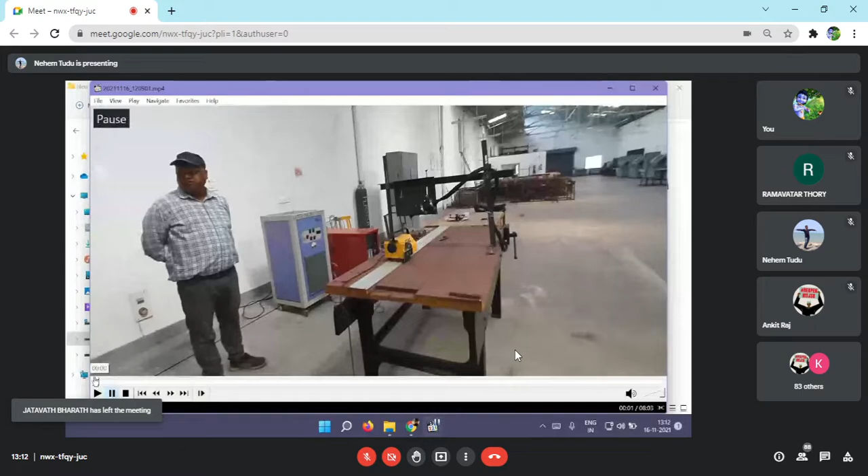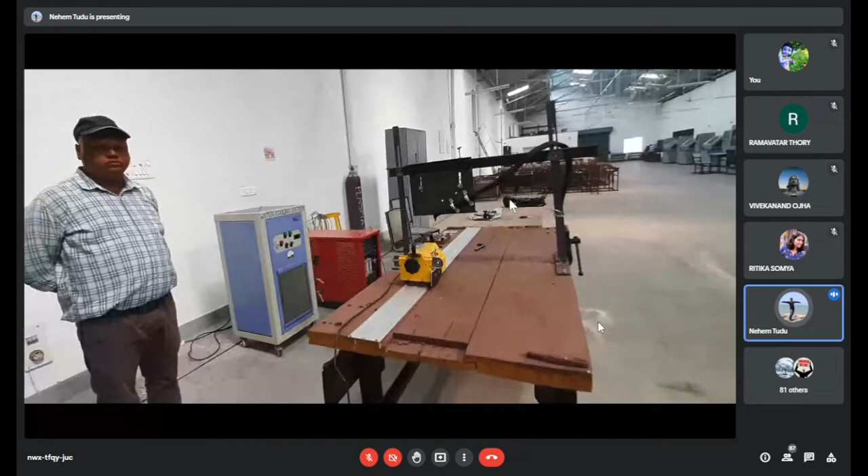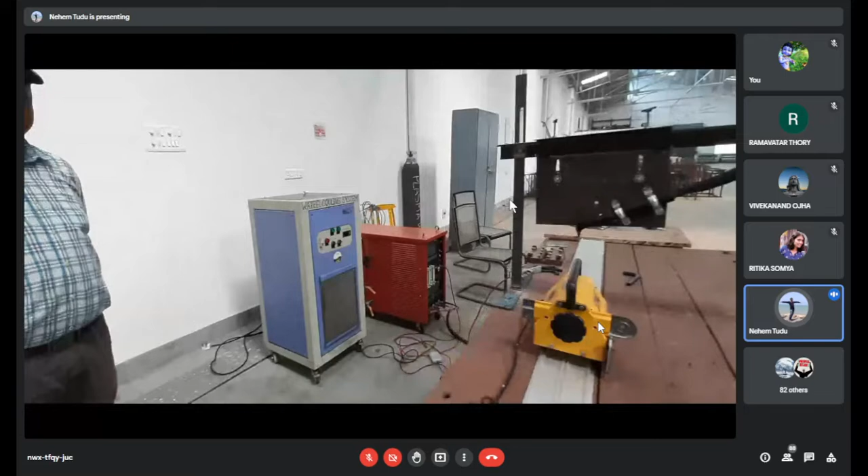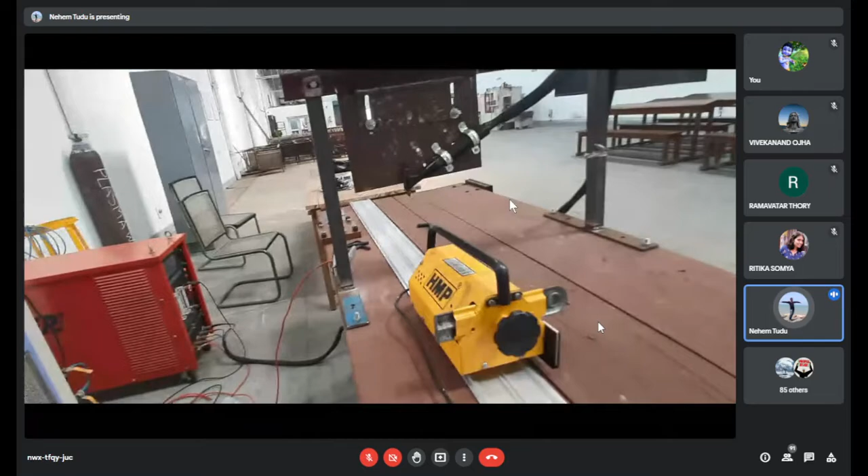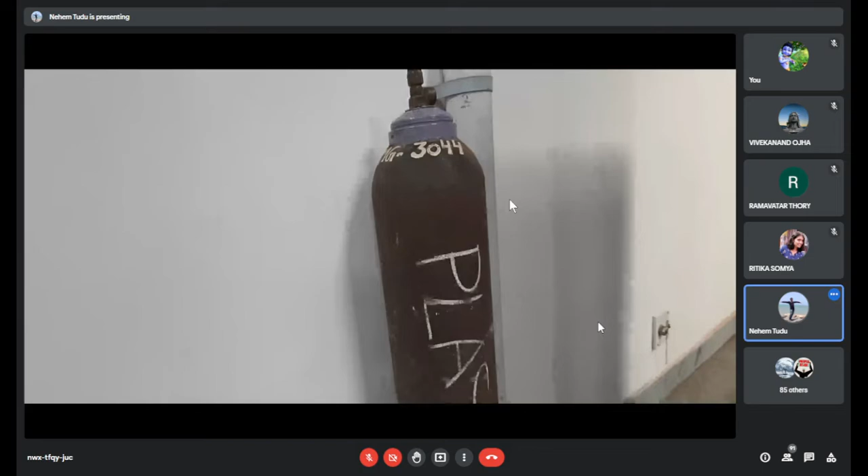So this is a cylinder, an argon gas cylinder. Currently this is empty, so it is going to be refilled soon. After that we can start working on this plasma welding setup. And this is a cage where this cylinder will be kept.

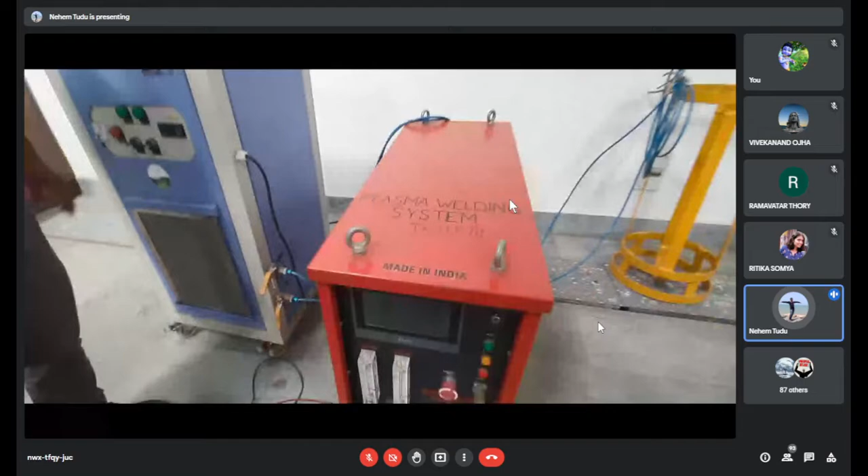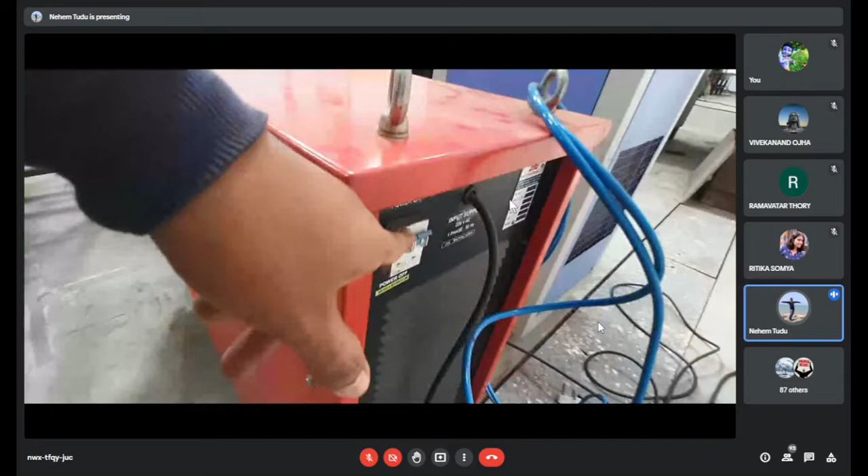And this is the plasma welding system. From the back side we can see there is a power switch, and when power is given to this, there is a main switch. Here we can switch it on and off, and here there is water in and water out. This water will come from the water cooling system.

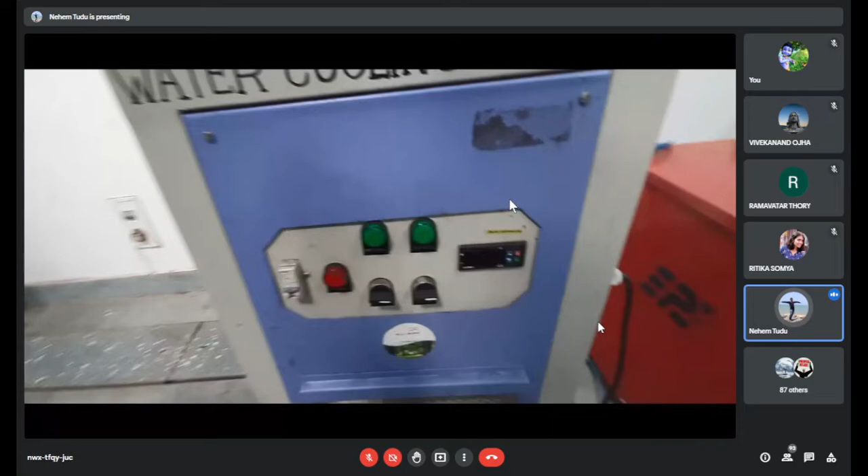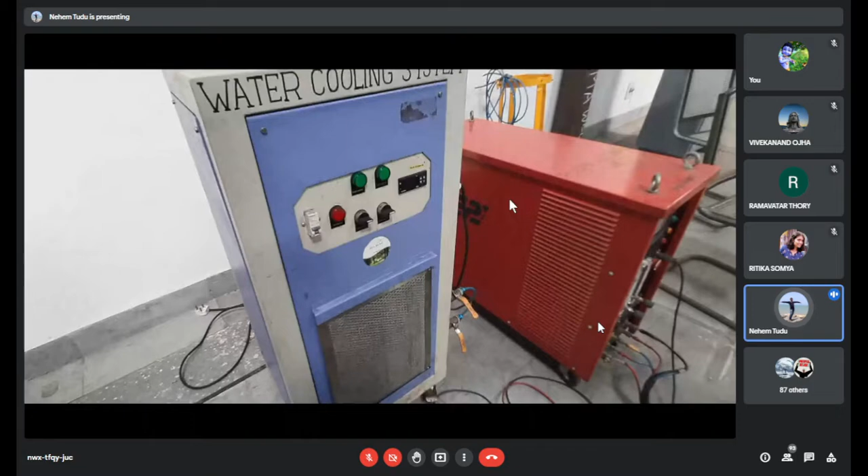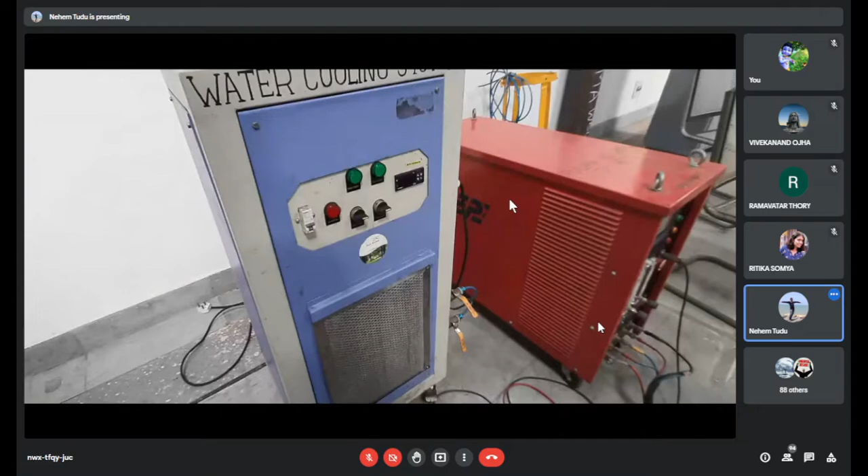This is a water cooling system, basically a water cooler. Its function is to cool the water, and the purpose of cooling the water is to control the temperature of the electrode, because while doing the welding the temperature of the electrode will rise, and it is very important to control the temperature of the electrode. Otherwise it will erode and may get damaged. Since we are using a non-consumable electrode here, it is very important to maintain the temperature.

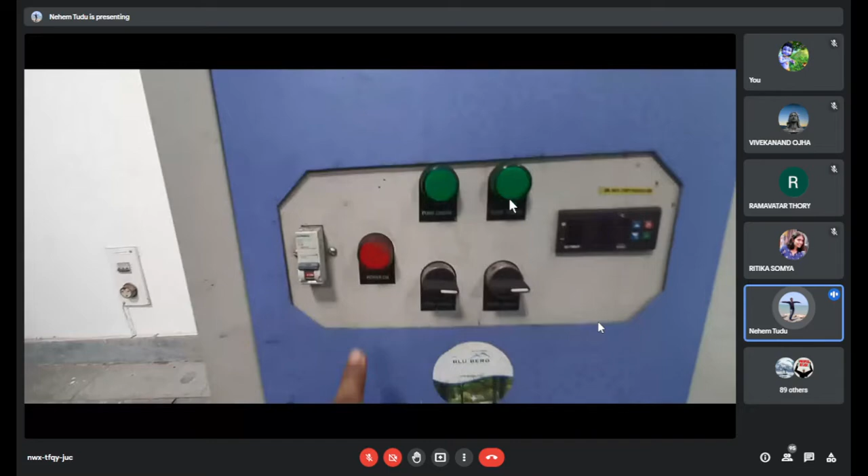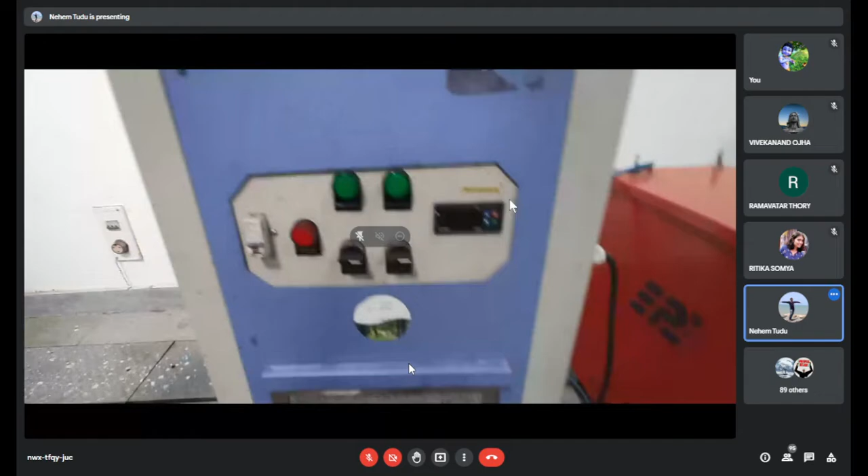So this will show us the temperature of the water, and this is the on and off for the pump. This will show whether our pump is on or off, and this is for the compressor, and this is the indicator for power on. This is the switch for the regulator, for pump on, and this for the compressor. Using this we can control the flow of the water.

Here you can see the water outlet of the water. From this point the water will come out and go to this welding system, and this is the water inlet. From here the hot water will come to this water cooling system.

This is the front view of the plasma welding system. So this is a lock. Here, if suppose we forgot to switch off the main switch, we can directly lock it, so that no one can misuse this setup, and we can avoid hazardous situations or whatever accidents.

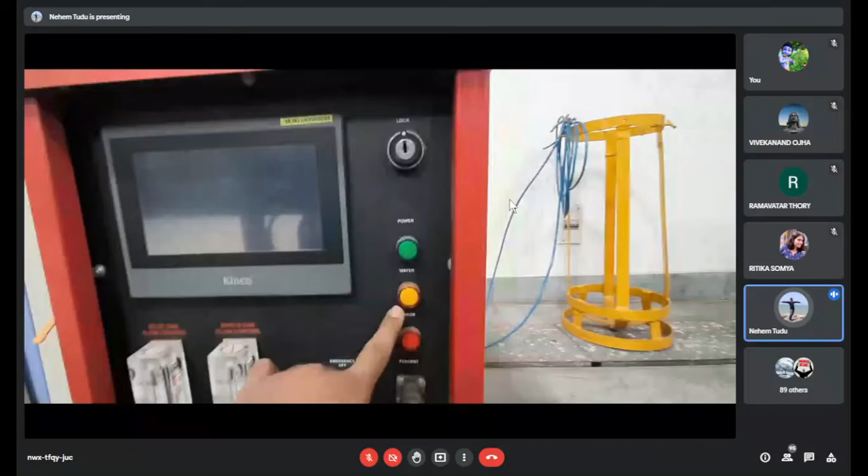So this is the indicator for power. This indicates whether water is coming or not, whether water flow is happening or not. And this is for error - if some error is there, this will switch on, and here on this screen the error will be shown.

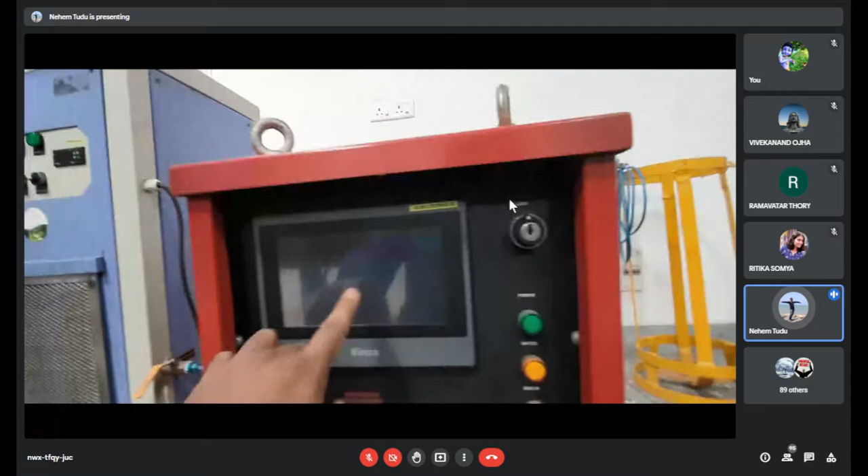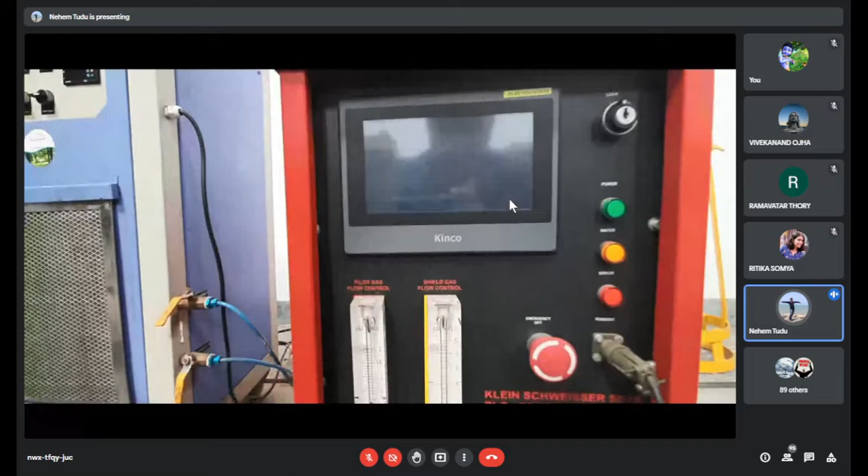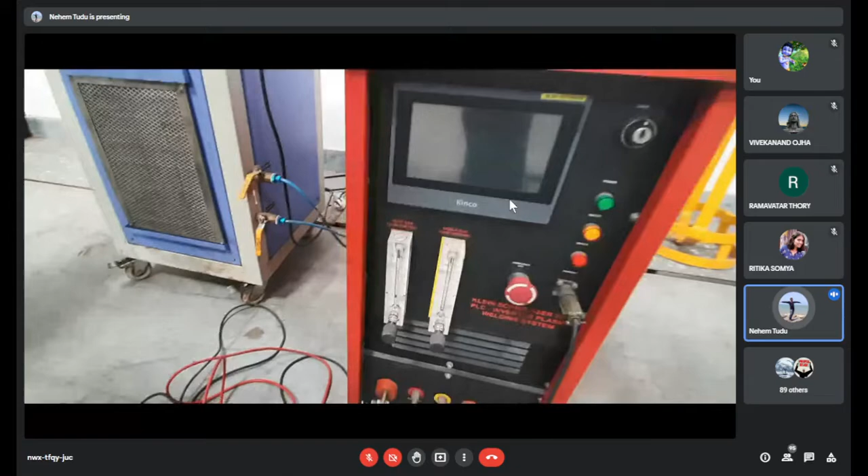And using this, this is an indicator of the flow of pilot gas, and this is for shield gas. This is the outlet of the pilot gas, and this is for shield gas. And this is the nozzle positive, and this is the electrode negative, and this will be connected to our workpiece. This is the electrode, which will be connected to our workpiece, and another electrode will be in this nozzle.

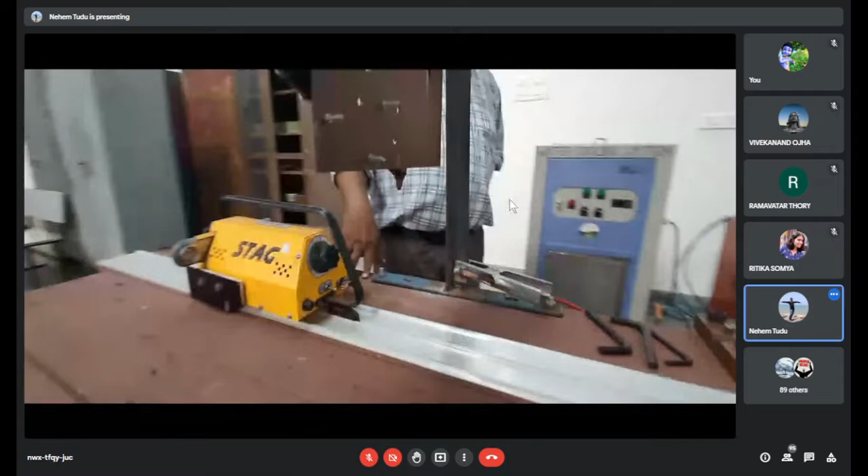And this will give the motion to our workpiece, and likewise we can do the welding process. Further, this technical thing will be explained by my colleague Kasif.

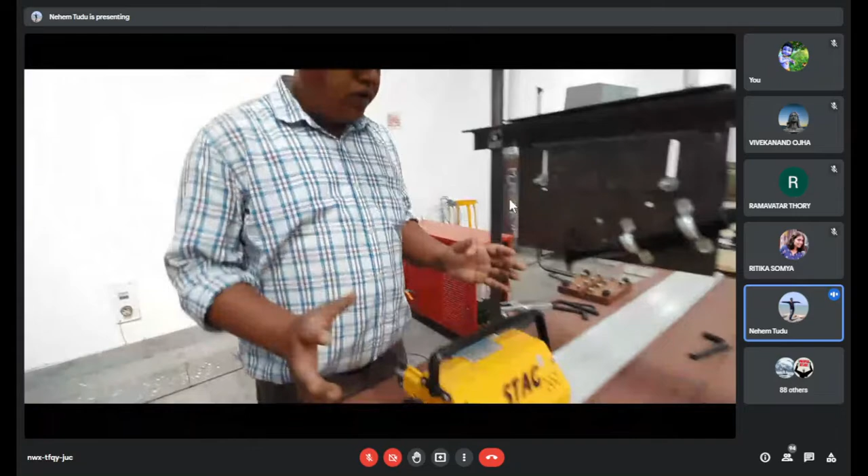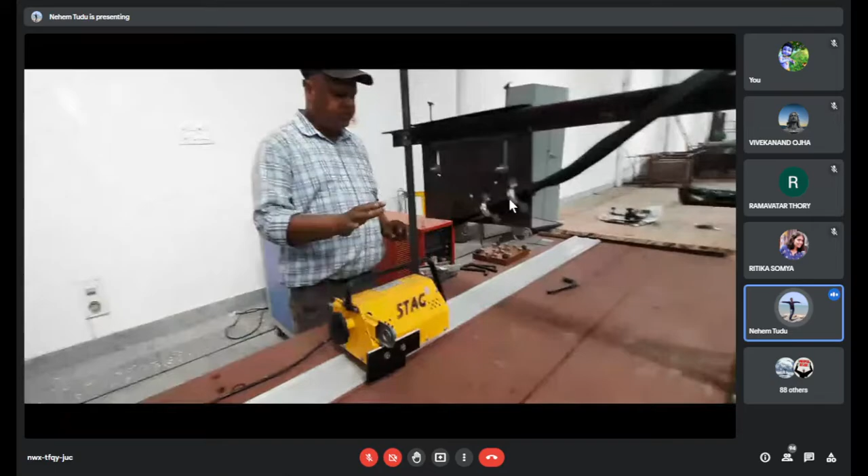Good afternoon. This is the welding speed machine, and we give the welding speed variation for the welding. First of all, I will show you this electrode, and this electrode will move up and down. Suppose we want 1 mm or 2 mm distance between the workpiece and the electrode, here we correct the distance between the electrode and workpiece. This arrangement manages the distance between the workpiece and the welding machine.

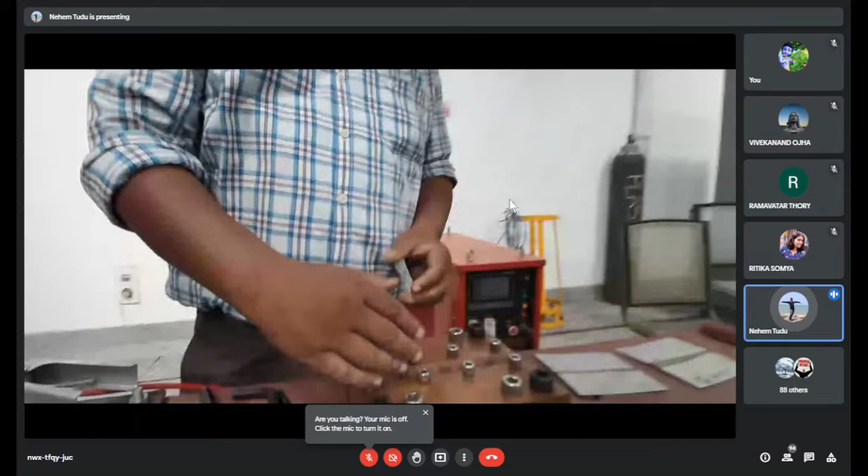Now I will show you the fixture. This is the copper plate fixture, and we fix the two plates of the workpiece. After fixing in the fixture, we keep this fixture on the welding speed setup and give the variation of the speed. This is the key which is used to loosen and tighten this fixture.

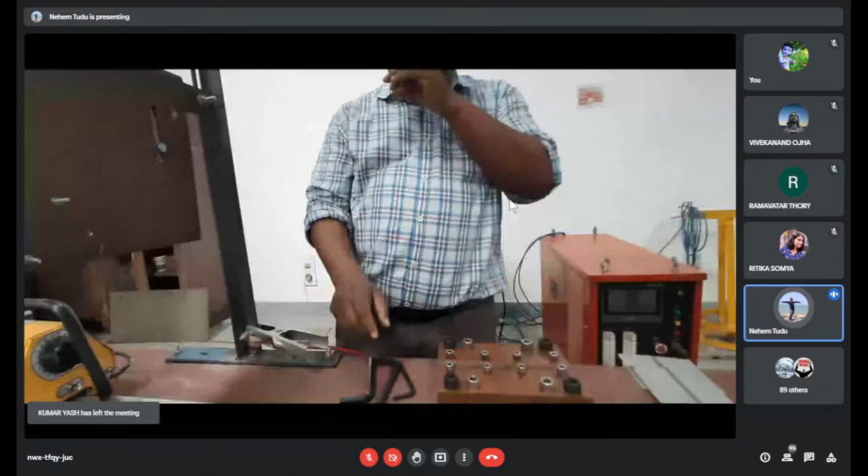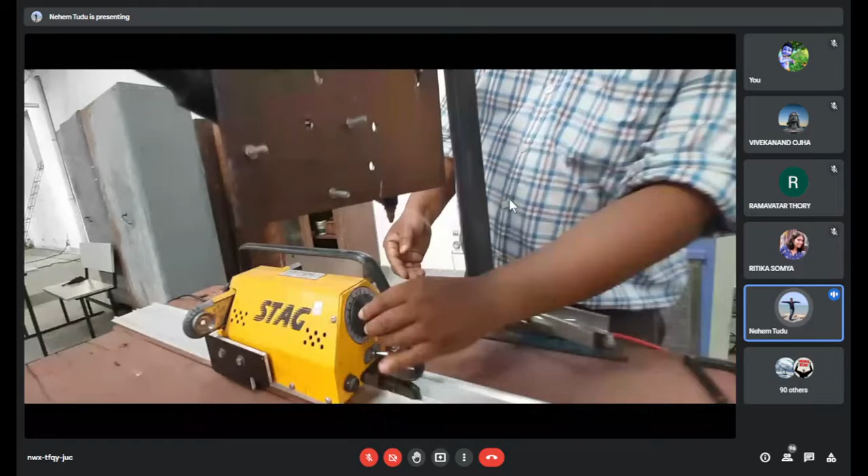So this is the variation of the machine. Suppose we want 2 mm per second or 3 mm per second, here is the arrangement for the variation of the welding speed. So this is the setup of our microplasma arc welding machine.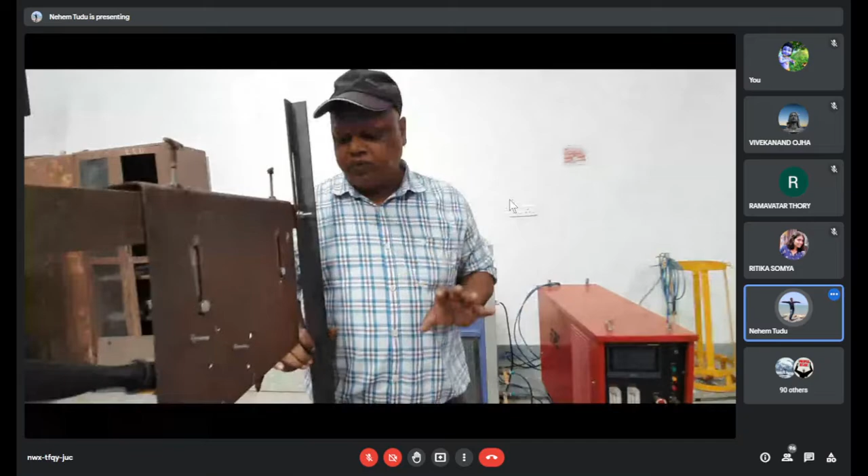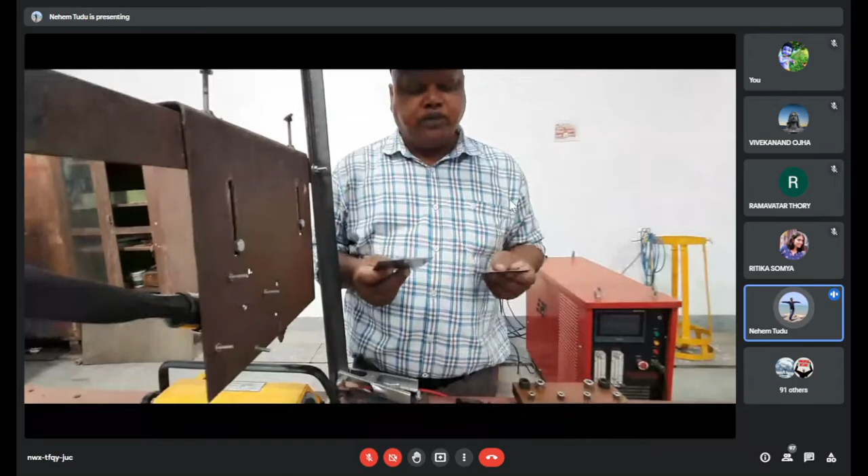Plasma arc welding and microplasma arc welding principle is the same, but in microplasma arc welding two parameters are important. First is the thickness of the workpiece - in microplasma arc welding we keep the thickness of the material less than 1 mm. Also, in microplasma arc welding the current is very low, below 15 ampere.

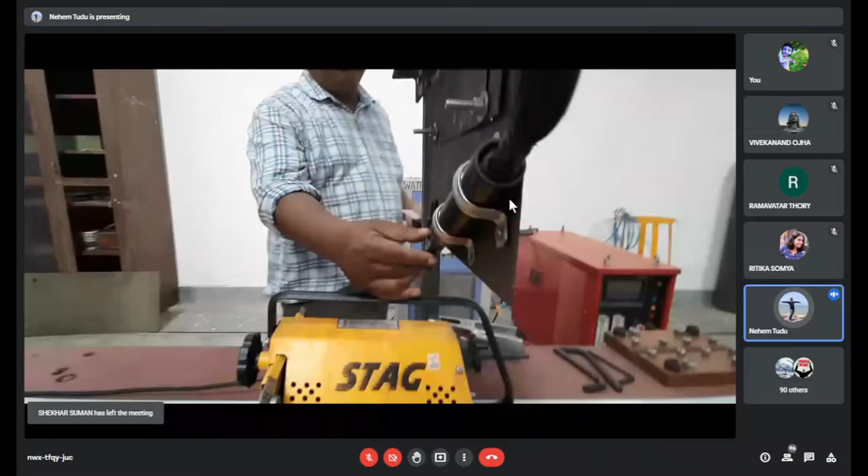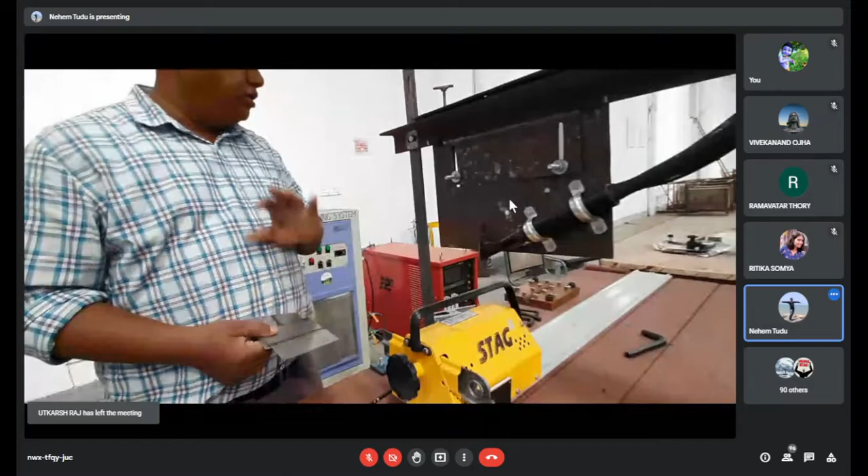But the principle is the same - when argon gas flows through the electrode, and we manage the correct distance between the workpiece and nozzle, we produce the arc. So the principle is same, but in microplasma arc welding two parameters are important: first is the thickness of the material, and other is the ampere current of the welding current. This is the overall view. When I get argon gas and make the correct point, then I will show you a picture.

This was for plasma welding, and there was noise in the background, so we're sorry for that noise. Any question from your side?

That machine showed an indicator for error - what sort of error does it indicate? If suppose the water is not coming, or the minimum pressure or minimum flow required for welding is not coming, that type of error will show. There may be a number of errors that will indicate on that screen.

Actually I wanted to show you how that screen will show - that screen is actually a touch screen, but the point present near our setup is not working, and it is very difficult to move that setup to another point, so we couldn't show you. If it is repaired, then we can show you, or we can make another video with proper presentation. There are many limitations right now in our workshop, so we're not able to show you the entire thing.

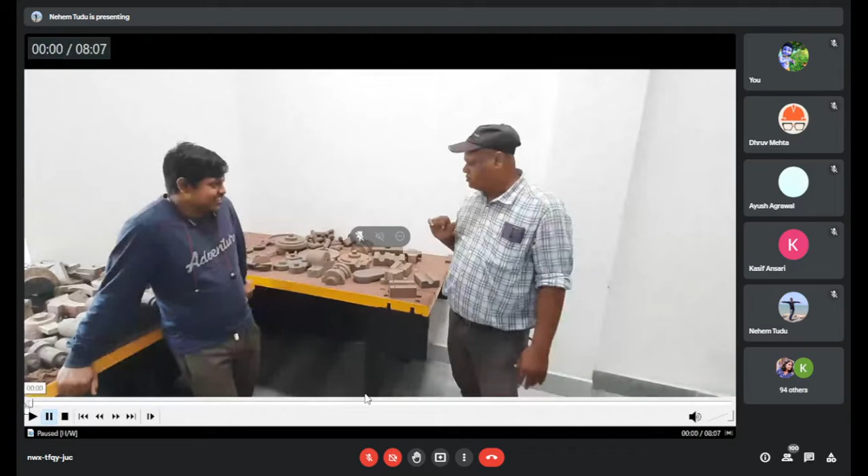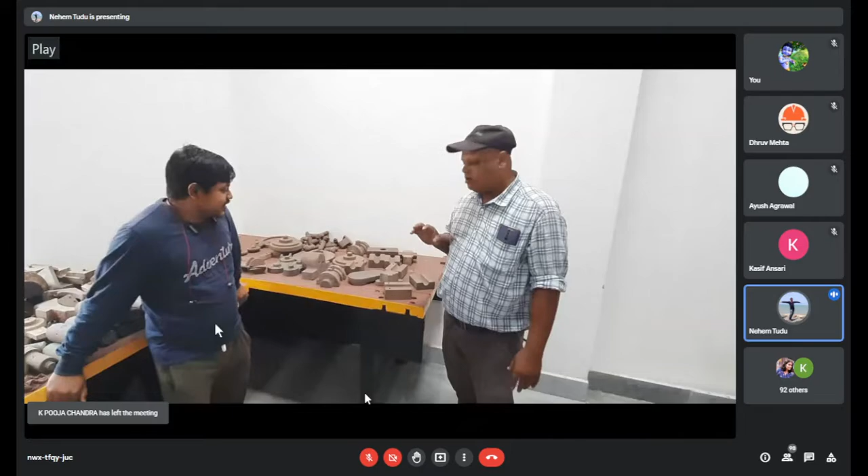Today I will show you a lab of the foundry section, this is the foundry lab, and I will show you how a product is produced in the foundry lab.

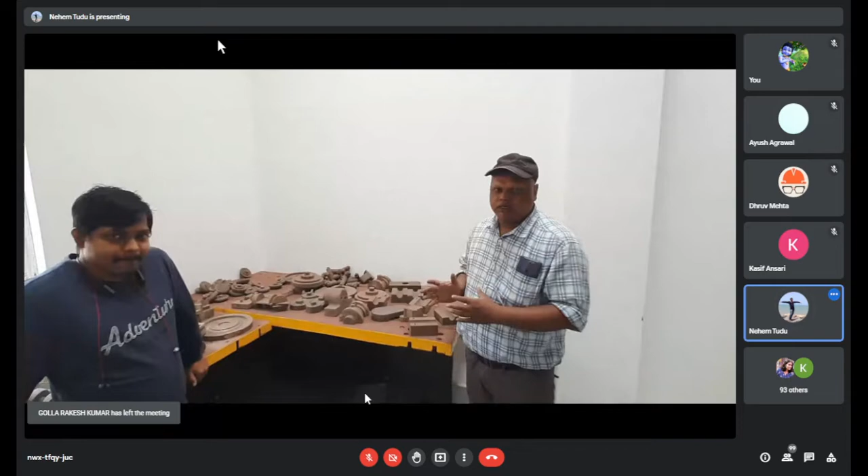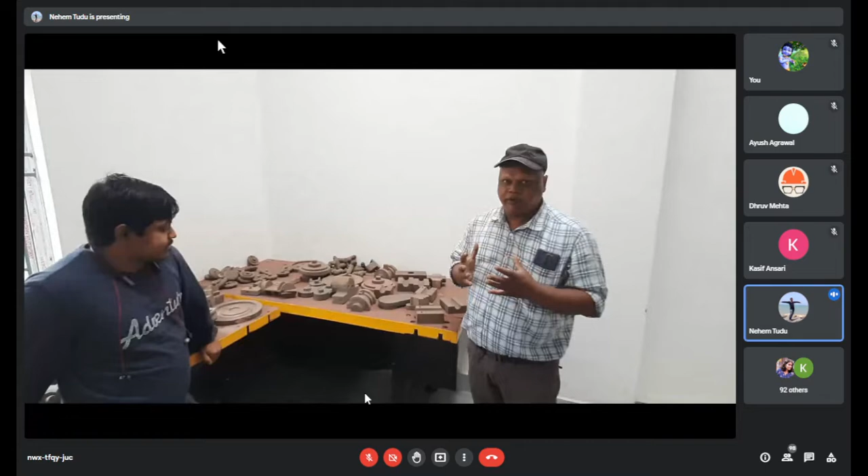First of all, I will introduce different types of tools and patterns used in the casting process. Casting is a process in which first a mold is prepared, and with the help of a pattern a cavity is generated in the mold. Molten metal goes into the cavity, and after solidification we produce the desired object. In this process we use different types of patterns and tools.

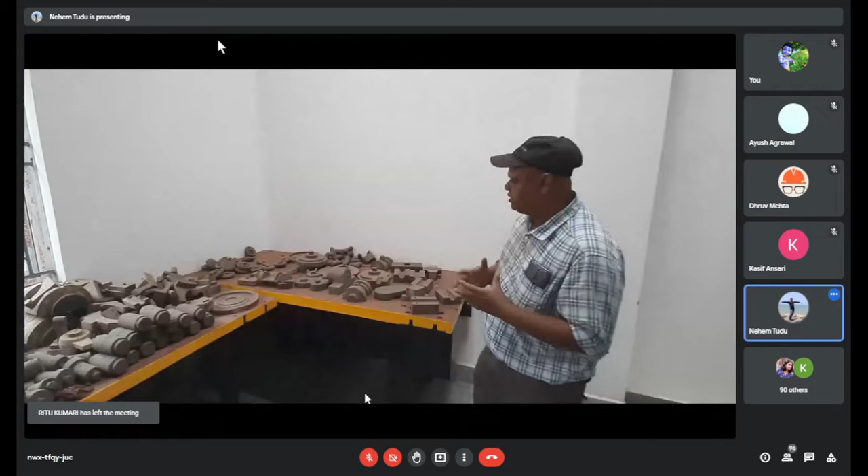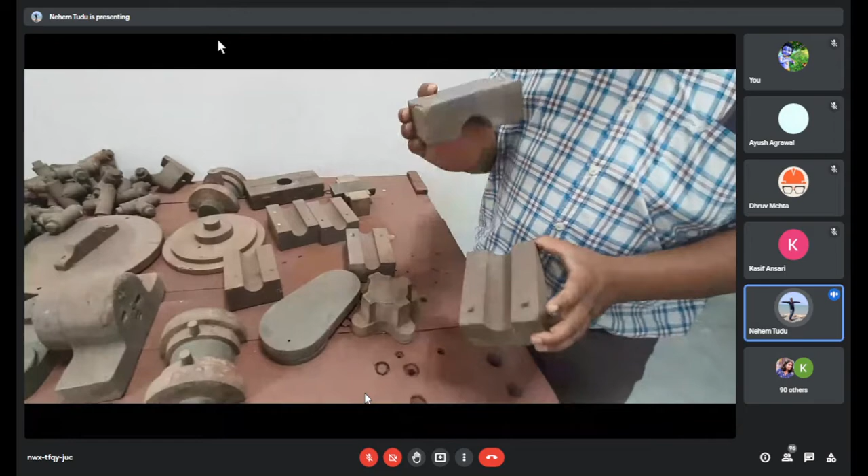First I will introduce the different types of tools. This is a different type of pattern. This is a two-piece pattern, meaning cope and drag. This is the top part, called cope, and this is the drag.

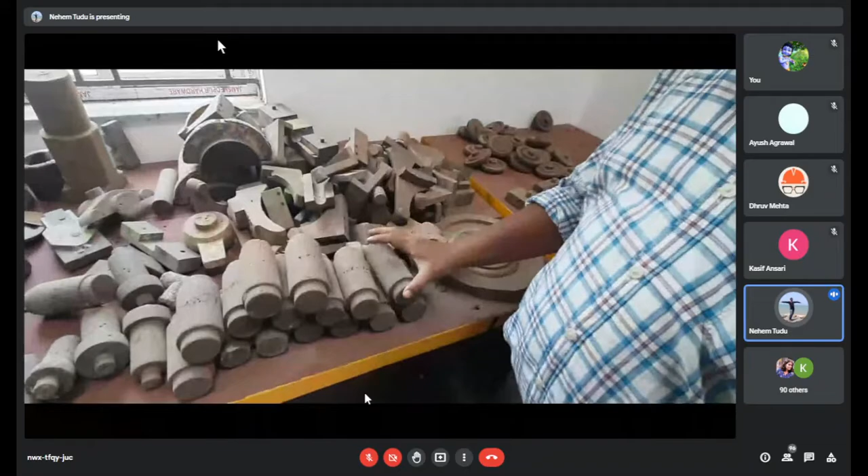This is a loose piece pattern, and this is a single piece pattern. Here are different types of patterns. This is also a single piece pattern, and this is a loose piece pattern. This is also a two-piece pattern.

When we join the two pieces, we produce a single piece object. So here are different types of patterns.

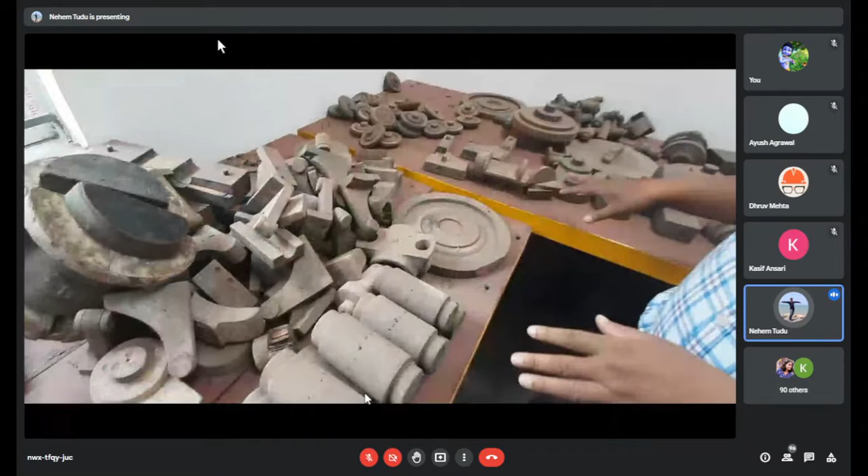Now I will show you - this is also a single piece pattern. When we produce a cube, we take an impression in the mold, and after removing this single piece pattern from the mold, the cavity is generated.

This is a different type of tool used in preparing the mold. This is a rammer - there are many rammers here - and this is a trowel. We use it to mix the molding sand. And this is the lifter. When we make an impression of the pattern in the mold, this tool is used for removing the pattern. This is also a lifter.

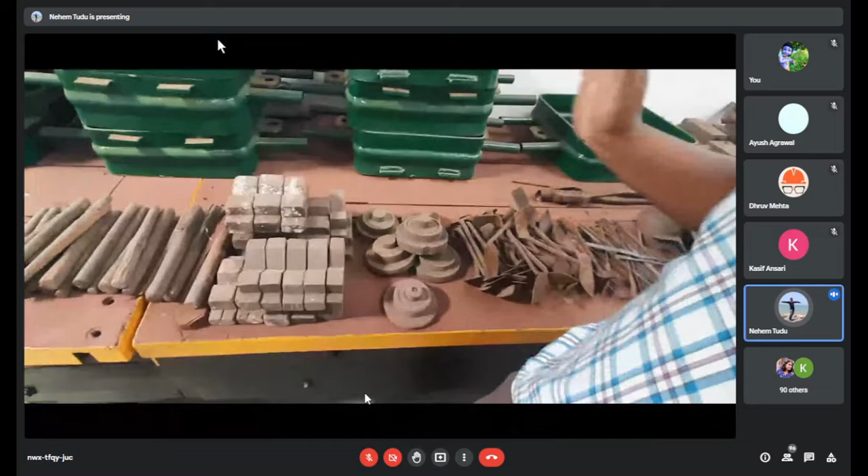This is a slick. And this is also a single piece pattern. Here too there are different types of patterns. This is also a single piece pattern. We produce different types of castings, so we use different types of patterns here.

This is a sprue. The design of a sprue is a conical cylinder. There are many sprues here, and this is a riser.

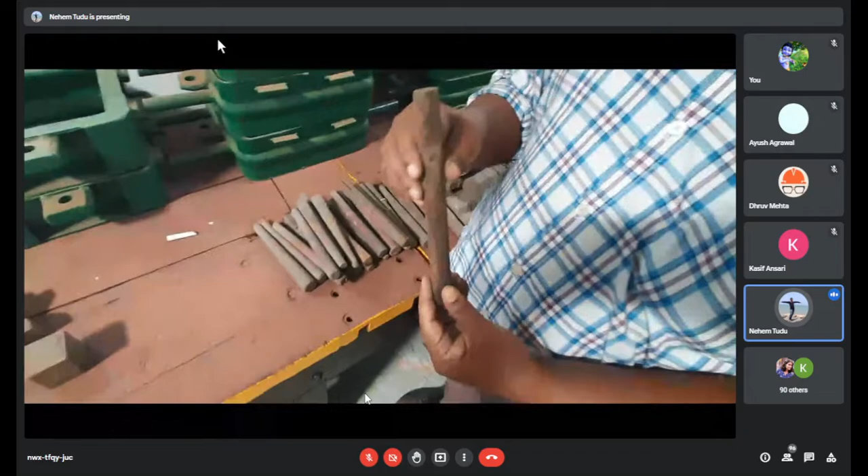The riser is a reservoir of the casting. When we fill molten metal into the cavity, after filling, it also goes into the riser, which acts as a reservoir. After the molten metal is poured into the cavity, it shrinks upon solidification, so the molten metal kept in the riser is used to compensate after solidification.

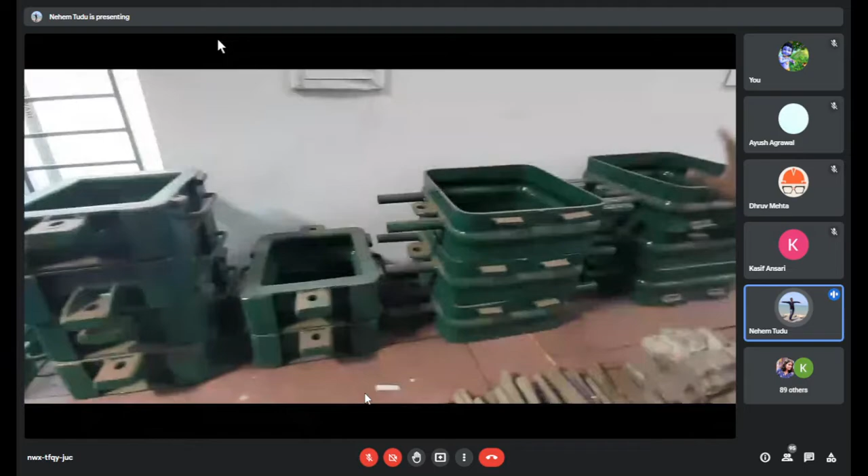So this is the reservoir, and this is a different type of molding box. In this box we keep the mold, and after placing it we ram it with the help of the rammer, and pack the mold using the rammer. I will show a practical demonstration of how to ram and pack with the rammer.

So you are all introduced to the tools available in our central workshop institute. Now I'm going to explain a little bit more.

As you can see in this split pattern, also called a cope and drag pattern, there is a pin and a hole. These pin and hole features are present so that misalignment can be avoided.

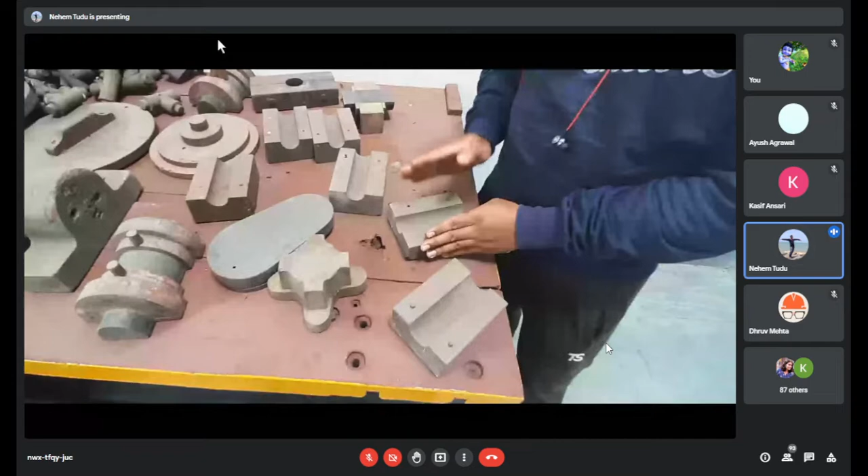So every pattern is designed like this, and while designing the pattern we have to take care of all the allowances we require, so that we can get a proper product.

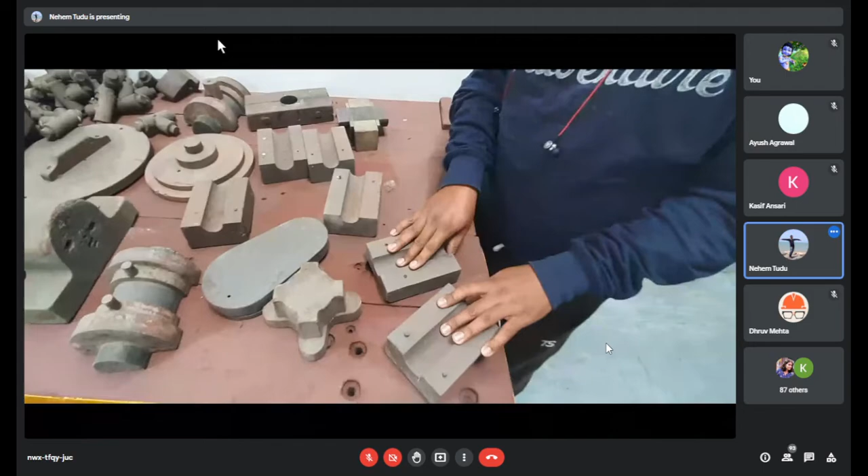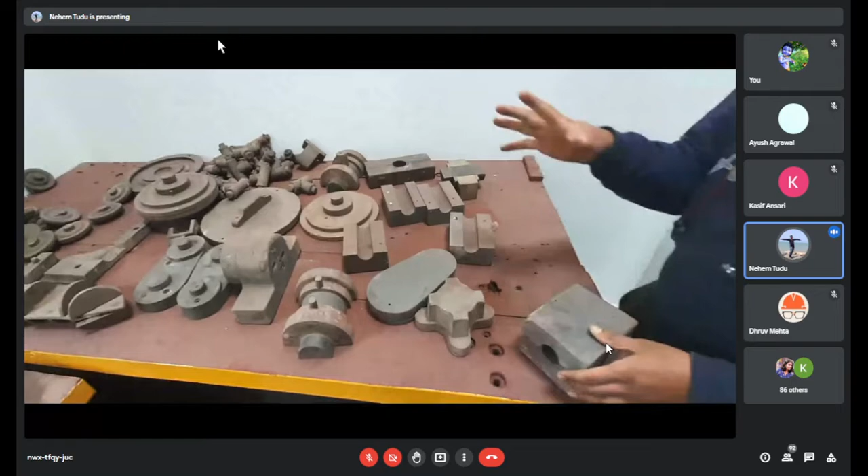So here, let me just give an overview. Here you can see whatever wooden patterns or wooden blocks are there - these are all different types of patterns, and each pattern has a different application, designed according to the different applications.

After the patterns, here we can see rammers are available and kept here. These are all used for ramming the molding sand, so that we can get a proper mold - a full tight, compact mold - so that it should not break.

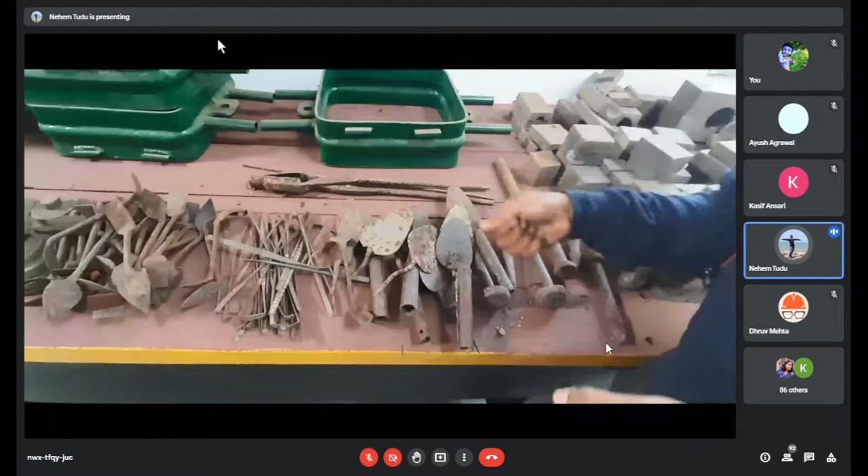All these tools are already introduced to you. This is a trowel. The use of a trowel is to mix the sand or take the sand from one place to another.

This is a lifter. The use of the lifter is to lift the pattern from the mold box after getting the proper molding.

This is a slick. It has two parts. This part is for gate cutting, and this part is used as a slick, as well as a trowel.

These are again patterns, different types of patterns. This is a single piece pattern, and this is a sprue pin, and this is a riser pin. Actually, here in this laboratory, we use a sprue pin as a riser as well, but in reality we should use a cylindrical part, not a conical one, for a riser.

And these are all molding boxes. Here you can see different sizes of molding boxes available. These are all for different uses, and different sizes are required depending on the pattern we need.

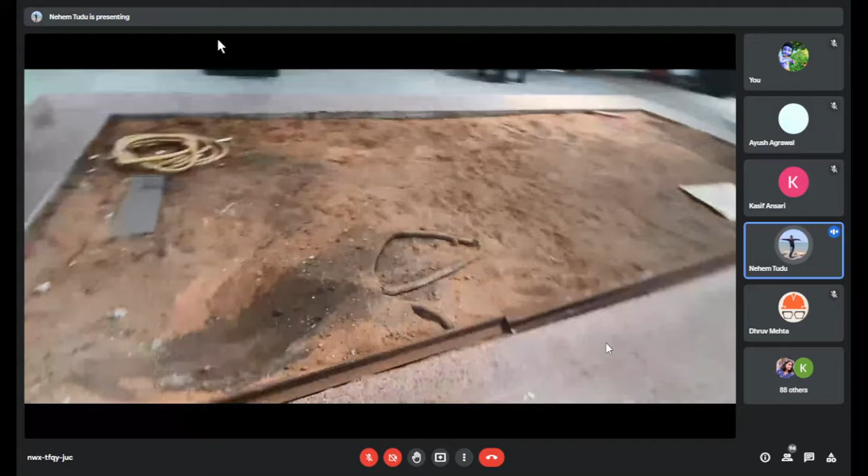And here, this is the molding sand. Currently this is dry, so before making the mold we have to give it moisture. For moisturizing, we need to spray water and apply water in this. Currently you can see there are lots of dust and dirt. So before that, we have to remove all the dirt and dust so that we can get a proper mold.

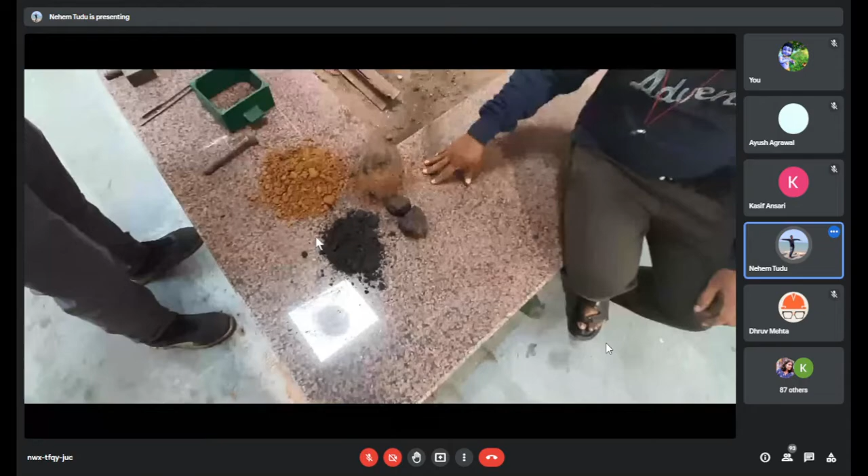Sand - so these are parts of sand. This is old sand which is already available in our institute, already mixed with binders, clays, and all elements. So the main elements I'm showing here - it's a mix of clay and sand.

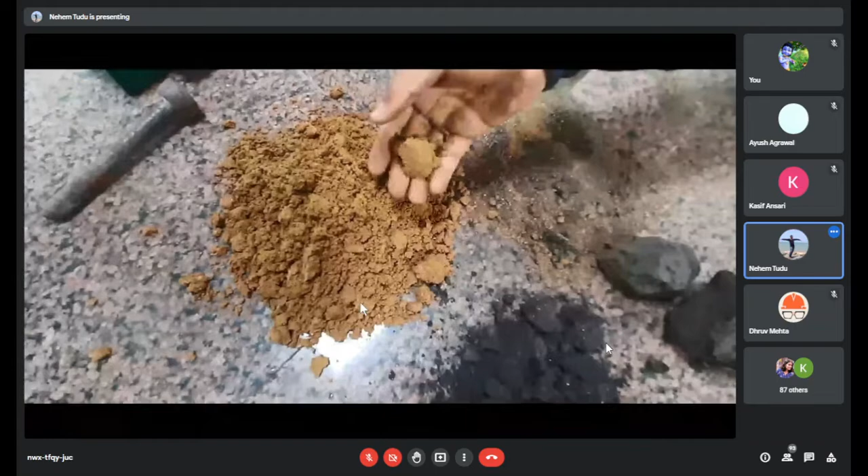So you can see this is already moistured, and here it is being used for making a mold. If I'm making a mold using my hand, there's graphite mixed in this sand, so that this also works as a binder. This is borax, which also works as a binder.

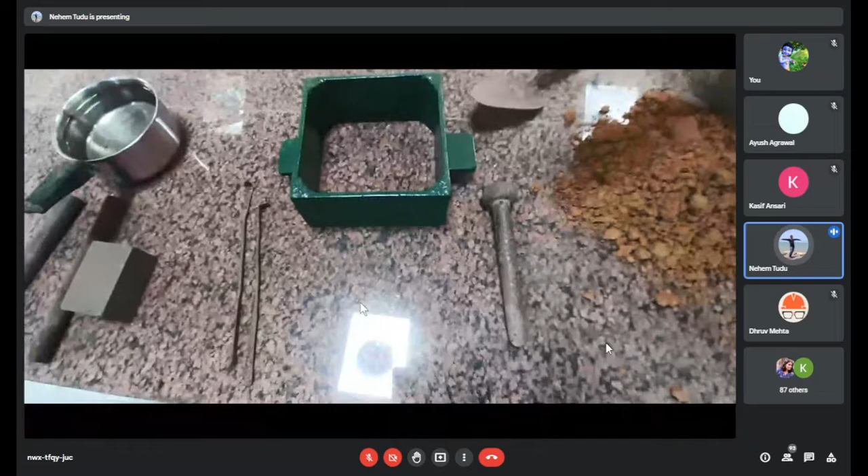This is a mold box. Using this trowel, we will fill the sand in this mold box, and use this rammer to ram the sand after putting the pattern. This is the pattern in the mold box, and we will make a mold cavity - the shape of the mold cavity will be the same as this pattern.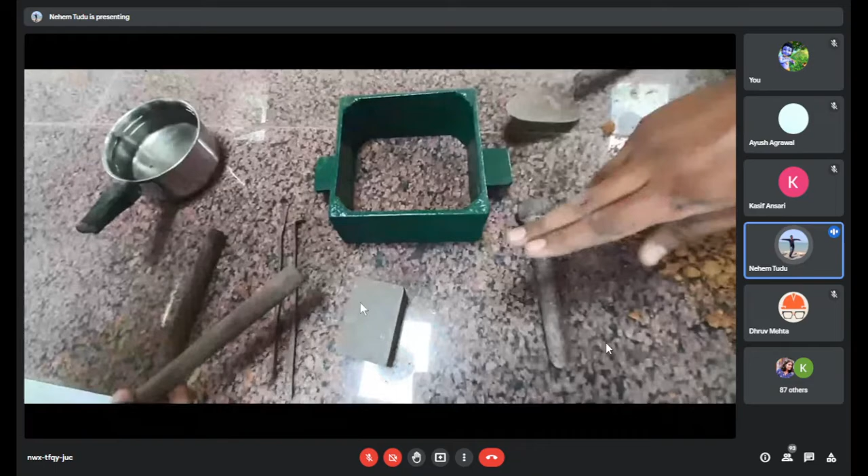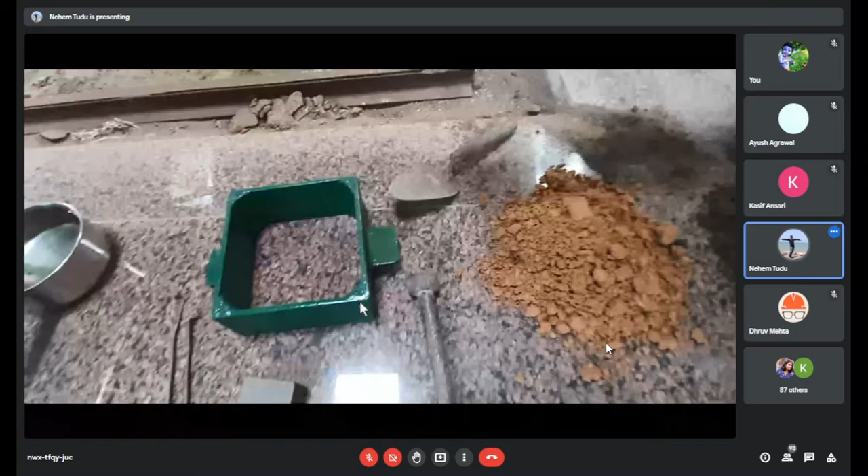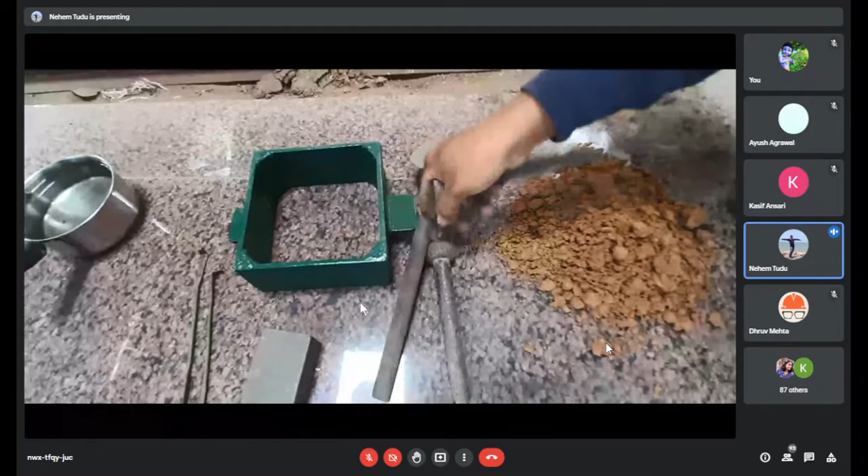Using this sprue pin, we will make a hole so that molten metal will directly go to the mold box. Using this riser pin, we will make a riser so that molten metal will rise to the top and work as a reservoir, indicating that our mold cavity is filled. And using that lifter, we will lift the pattern from the mold box.

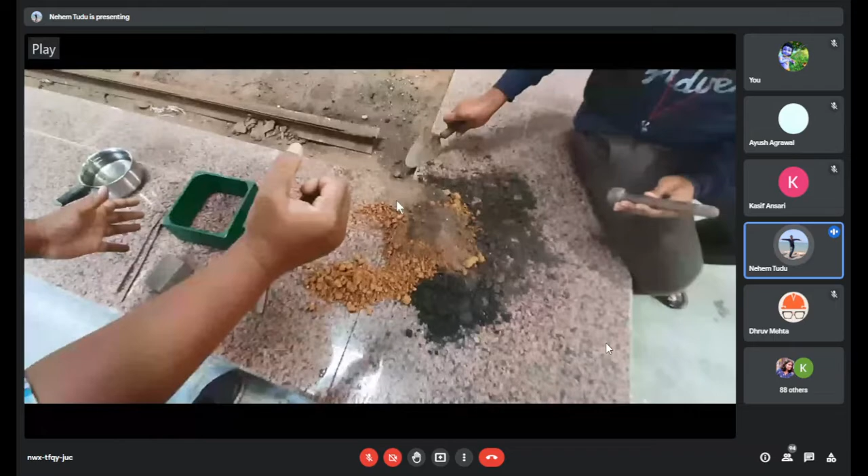Now we are preparing the mold. We mix all these things, and after mixing we put it in and ram it with the help of the rammer. We ram the mold to get close packing of the sand.

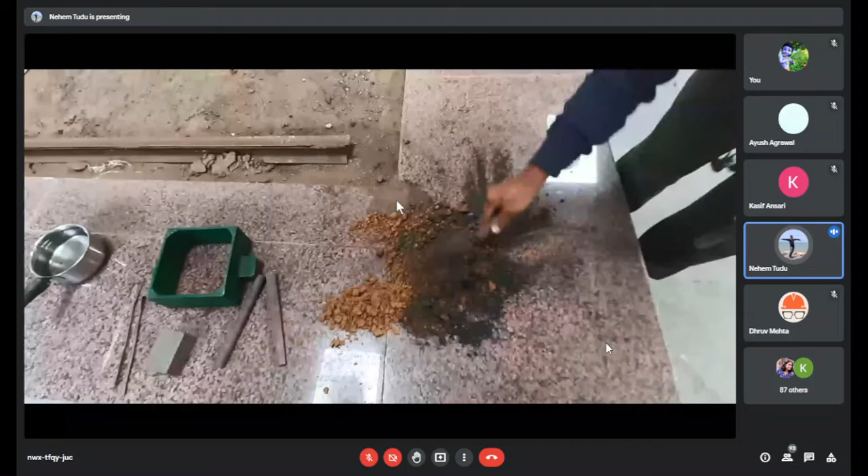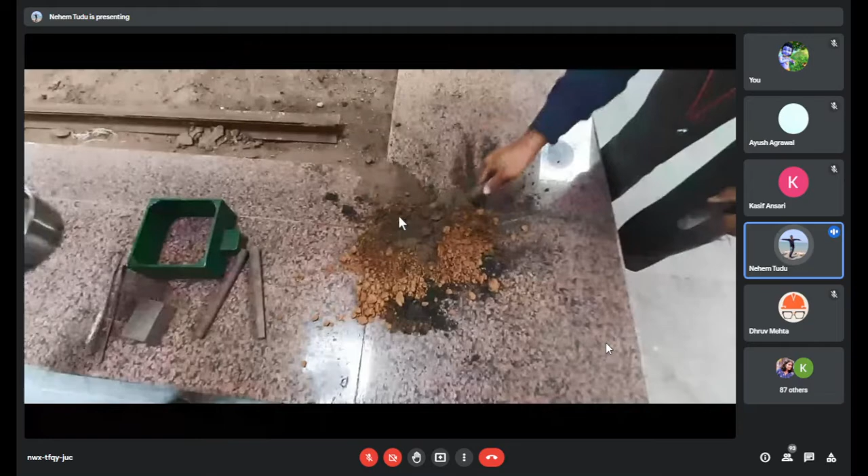Now we are mixing the mold sand, binder, borax, graphite, and clay also, and we also mix in a little bit of water. Now we mix all these things - binder, clay, sand, graphite, and water - and we produce a mold.

After a proper mixing of the sand, we put this pattern inside this mold box.

This is the sprue pin, and this is a riser. The riser should be in a proper place - not too near to the pattern. There should be some distance between this riser pin and the pattern so that it does not affect the pattern or the mold cavity.

So after that we will fill the sand.

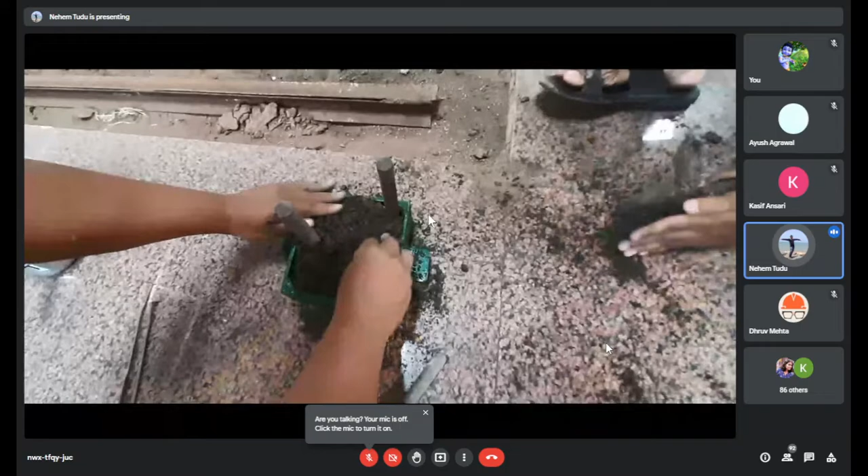After filling the mold box, we do proper ramming of the mold.

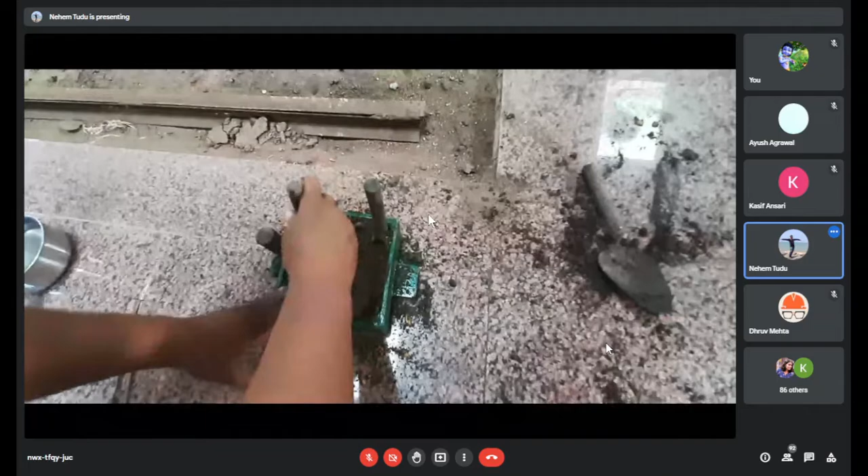Giving the proper ramming. Ideally we should give a vent - we should give a vent, but right now we don't have a vent rod, so we have to remove this pin carefully so that it does not break the mold.

So right now we have removed this sprue pin again.

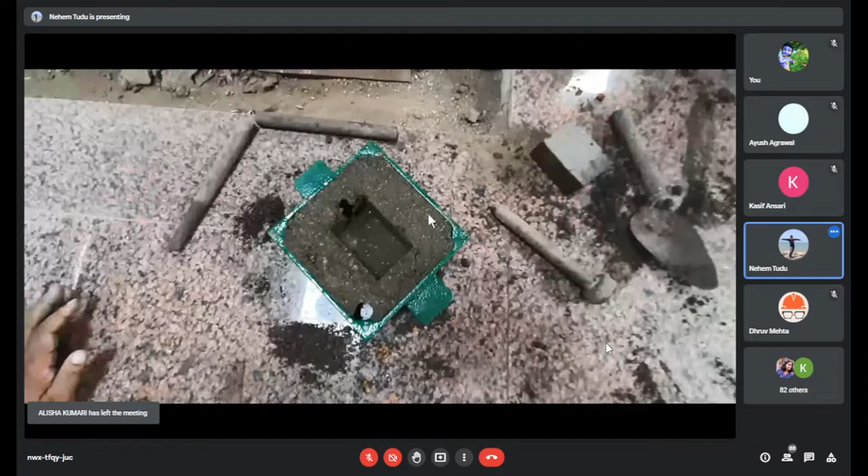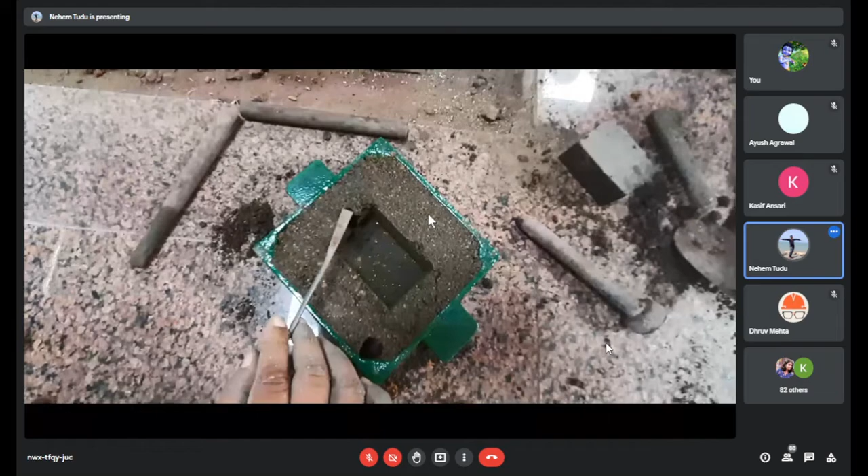Okay, this type of cavity will be generated. This type of mold cavity will be generated. After the cavity is generated, molten metal will be poured into the basin, and it goes to the base, then the runner, and we fill the molten metal in the cavity. After filling, the molten metal goes into the riser.

After filling the cavity, we remove it and the molten metal remains for some time for solidification. After the solidification, we produce the object. So this is the process of casting.

During this construction, a few tools are missing, so we couldn't show all the tools. Like sieves are missing and the vent rod is missing, so that's why we couldn't show you the proper process that is used in factories or industries. Ideally it should be on a sand bed, but the sand bed here is very dirty, with parts of bricks and rocks in it, so we avoided that place.

So any questions from this video? Hello? Am I audible? Yes sir. So any questions?